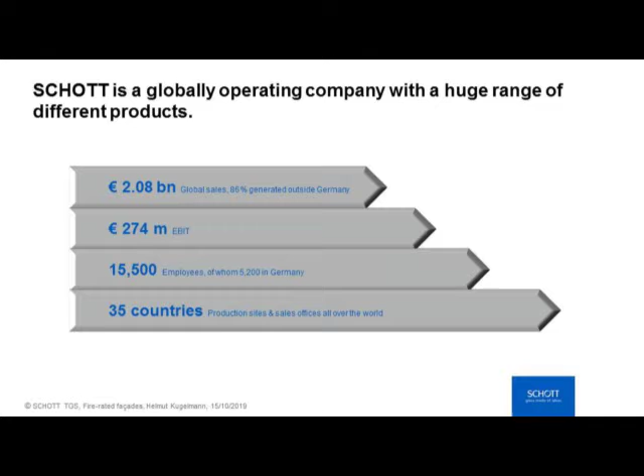First, only a very short introduction of our company. Schott is a very old German company founded more than 130 years ago, and our goal is specialty glass for very different applications. You can see the figures, it's a globally active company. And I have to admit, unfortunately, the sales are not only with fire-rated glass.

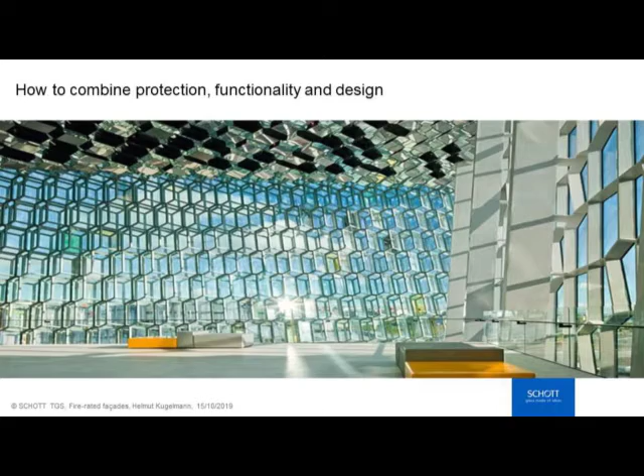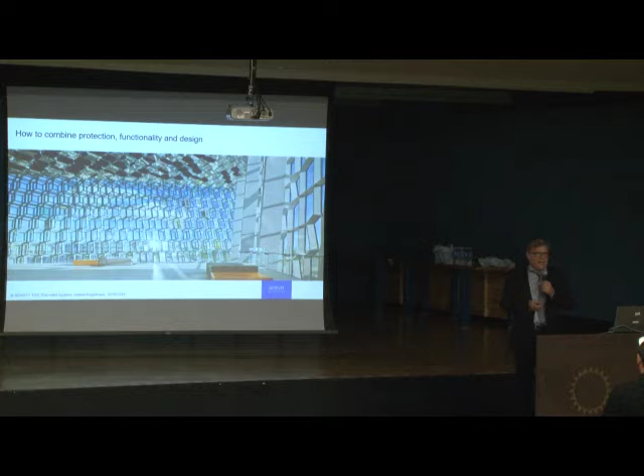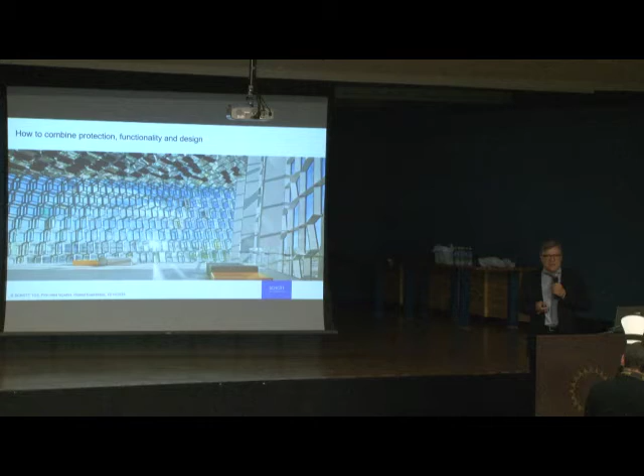But this is our topic today, and the question is how to combine fire protection and other functionalities in architectural solutions. There are many architects here as well, and I guess the architect doesn't want to have a fire-rated glass only for itself. I think the fire-rated glass shall fulfill also other requirements like U value, design requirements and so on, and by the side it should also fulfill the fire rating and the security requirement.

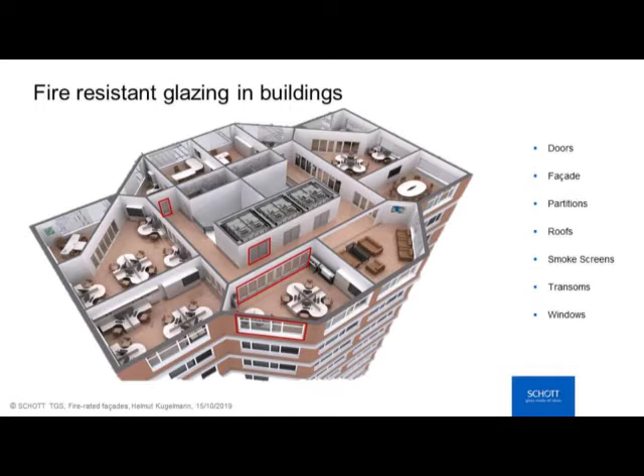So there are a lot of different areas in a building where we need fire rated glass. The most prominent area, as you all know, is the fire rating or protection of escape routes. If you want to have glass in the escape route, it shall be fire-rated glass. But also, partitions, doors, and roof glazings are all applications for fire-rated glass. Our topic today is especially the application for facades.

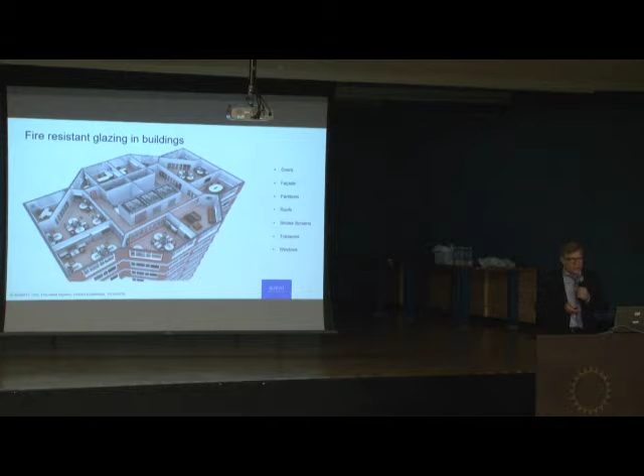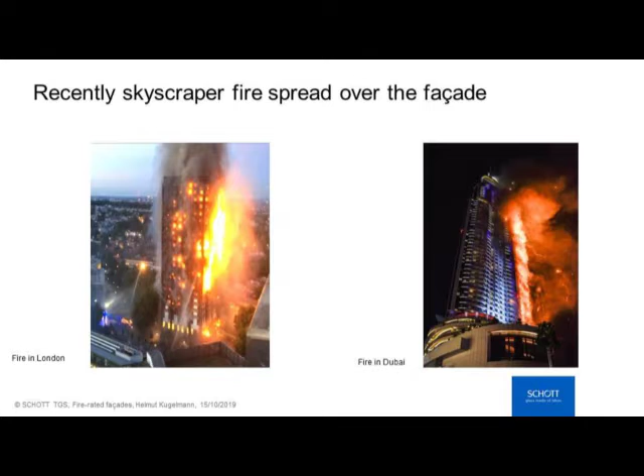This is a very interesting and up-to-date topic, because I'm sure you still have in your mind the crucial fire in London, the Grenfell Tower, where more than 70 people died. It was not because the glass failed, but because the facade system failed, so that the fire could spread very, very quickly from one floor to another.

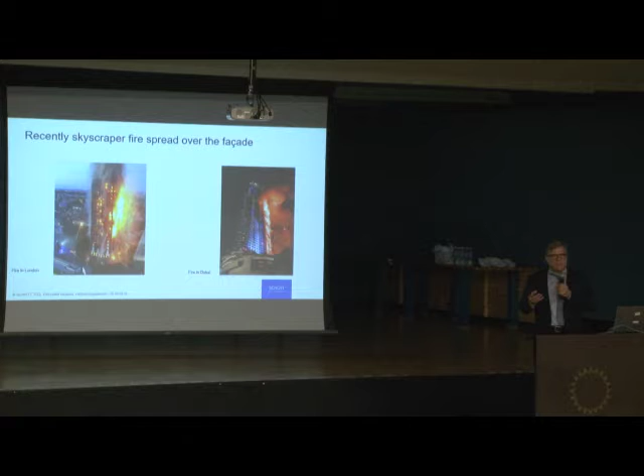And a comparable fire was in Dubai also, I think it was last year. Fortunately, nobody died, but in principle it was the same, that the fire spread very quickly from one floor to another. And the question is how can we prevent such a behavior of the fire.

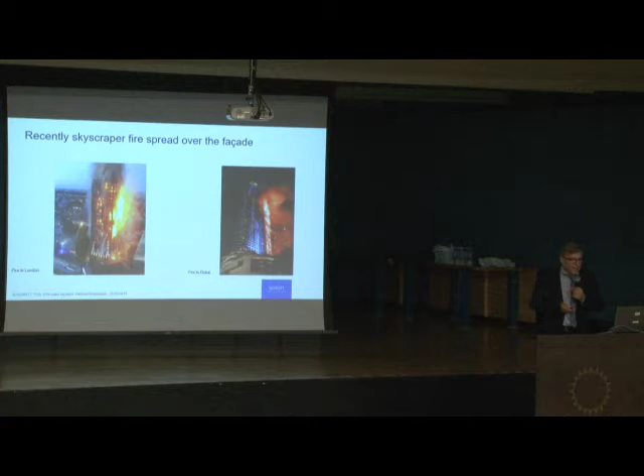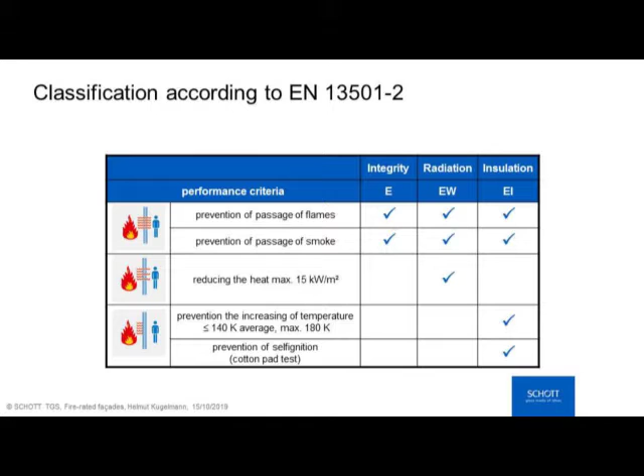So let me give you first an overview of the classification, especially of the European classification of fire-rated glass. We distinguish between three different classifications. This is the criteria E for integrity, and the requirement for E-glazing, like the name is showing, is only integrity. For E-glazing, there is no measurement of the heat radiation which goes through the glazing.

The other most prominent classification in Europe is the EI classification. This is integrity and insulation. Here for EI, the temperature is measured on the unexposed surface of the system, also of the glass.

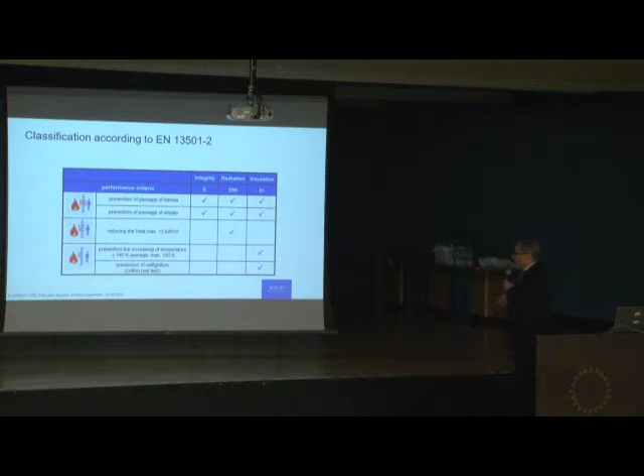So the temperature is measured, and in difference to EI, there is a classification in between. It's called EW, but in difference to EI, the temperature is not measured on the surface, but the radiation is measured at a certain distance, in particular 1 meter distance from the specimen. So it's not the temperature, it's the energy which is measured.

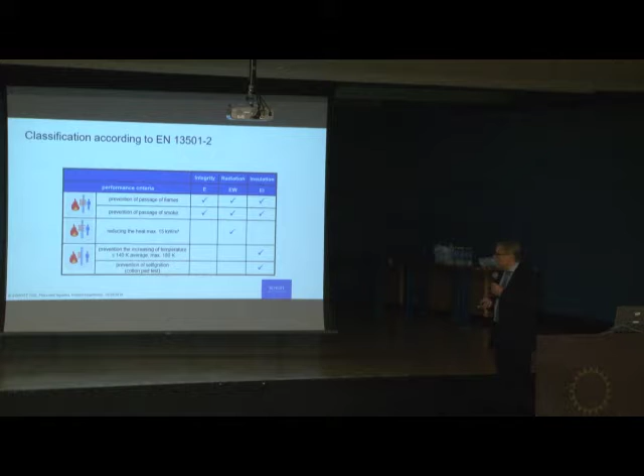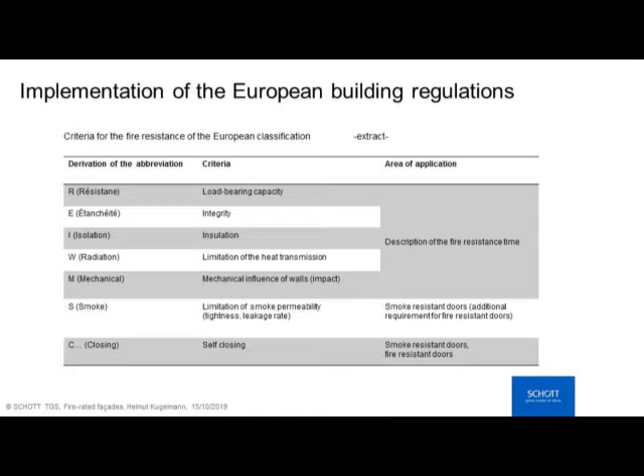A couple of years ago, this new naming of the different classifications was introduced and launched in Europe. Now in Europe we have common naming of the different classifications, and here you can see the meaning of these letters which we are using for E, EI, EW.

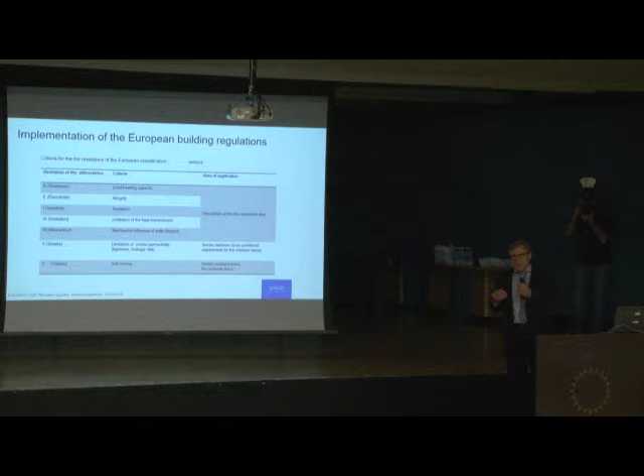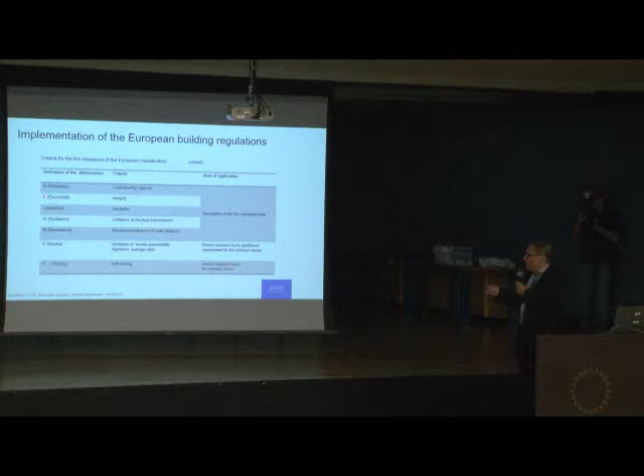The system is actually very easy. E is the French expression for integrity - please do not force me to pronounce the French, I have no clue how the pronunciation is, but the meaning is integrity, therefore the letter E. And for insulation, we are using the letter I, and EI therefore is only a combination of E and I, so that we have integrity plus insulation.

The same is with the radiation. The radiation has the letter W, so it is only the combination E and W, which means integrity and reduction of the radiation. This is in principle the system of the European classification and the wording of the European classification.

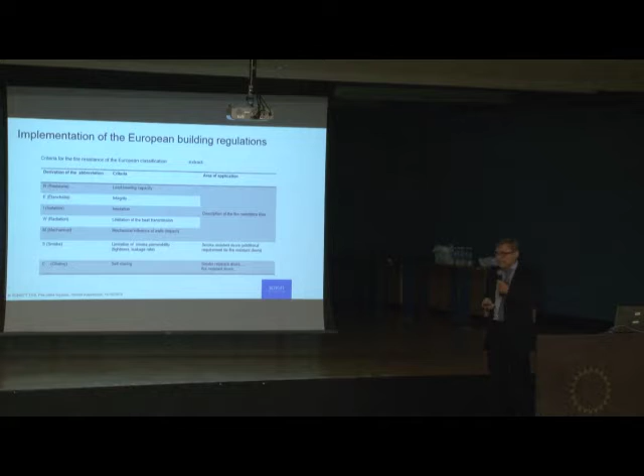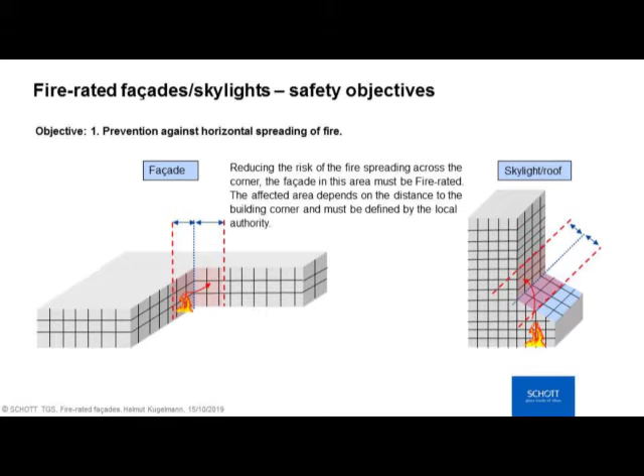So, let me come to our main topic today: facades and glazing in facades. We distinguish two different situations in the facade. The first situation is to prevent horizontal spread of fire.

For example, we have a building with such a shape, and the goal is to prevent, if there is a fire in one area of the building, that the fire doesn't spread round the corner to the other area. Therefore, in most building codes in Europe, there is an area of the facade defined beginning from the corner, and it depends on the country and the building code. It can be from 3 meters to 7 meters distance from the corner to both sides, so that if we have a fire here, it cannot spread because of this fire protection barrier to the other part of the building.

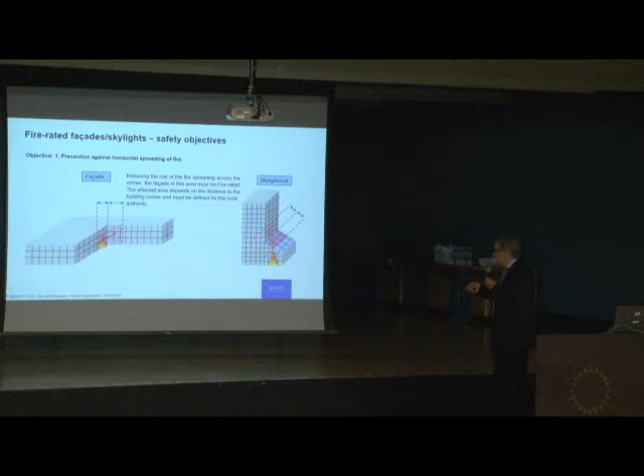Similarly, if we have a skylight in front of an upgoing facade, like you can see here, it's in principle the same. If we have a fire here in this area, to prevent the fire spreading over the skylight to the windows above, we need this area as fire protection. This is the principal system in most building codes in Europe to prevent the horizontal spread of fire.

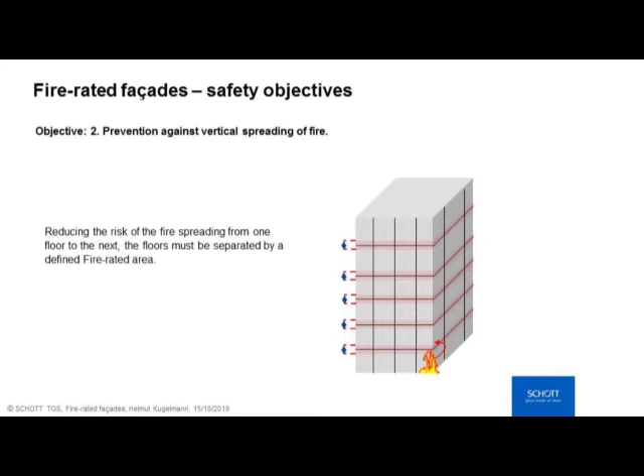In the other case, which is more prominent than horizontal spread of fire, we need to prevent and avoid vertical spread of fire. This is exactly the case you've seen in the pictures of the crucial fires in London or in Dubai. So what can we do to prevent the fire jumping from one floor to another?

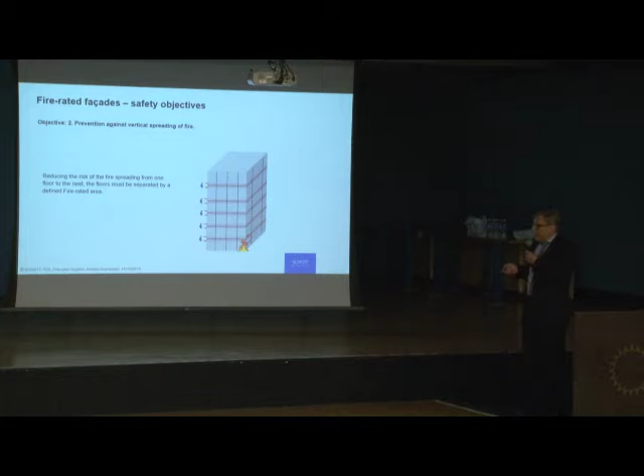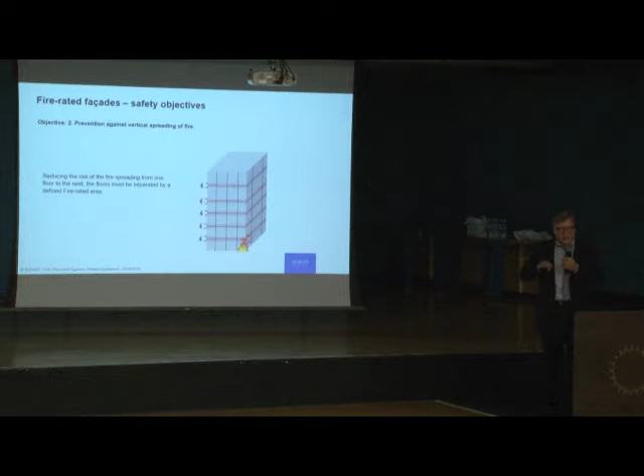Therefore, in most building codes, there is a barrier defined here as a limitation from floor to floor. The height of this fire protection barrier is different from country to country. I have learned that in Brazil, the height of this barrier is 1.2 meters. It's very similar in other countries - sometimes 1.1 meter, 1 meter, or even 90 centimeters.

And it depends also on the height of the building, so if we have a high-rise building, this barrier is higher than for a lower building. But in principle, it's very important for all such buildings to have this fire barrier to prevent the fire spreading from one floor to another.

So how to solve it in case you want to use glass, as much glass as possible - a fully glazed facade, which we of course appreciate - but how to fulfill this requirement to have this barrier included in the facade system, so that there is no difference in appearance from the other non-fire-rated areas of the facade? This is not very easy, and here we come to the different glass types and what is the most reasonable glass type to fulfill this requirement.

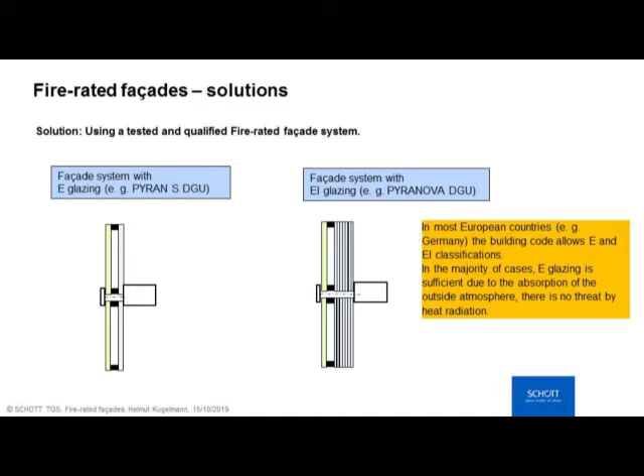To give you an example so you can imagine the difference in thickness between E and EI: if we consider a requirement for 2 hours, 120 minutes, the thickness of an E-glass is 6 millimeters. Compared to an EI glass for 120 minutes, the thickness is 52 millimeters, just for the single glass. So you can imagine it's very difficult to combine such a big system into a standard facade system. Therefore, from the technical and combination side, E-glazing is much easier to handle.

We have to consider that in cases where we prevent the spread of fire from one part to another, the fire in every case goes outside of the room, outside of the building. Then after a while, after a certain distance, the fire wants to come back into the building. This passage and distance is outside, so the atmosphere absorbs a lot of the energy of the fire.

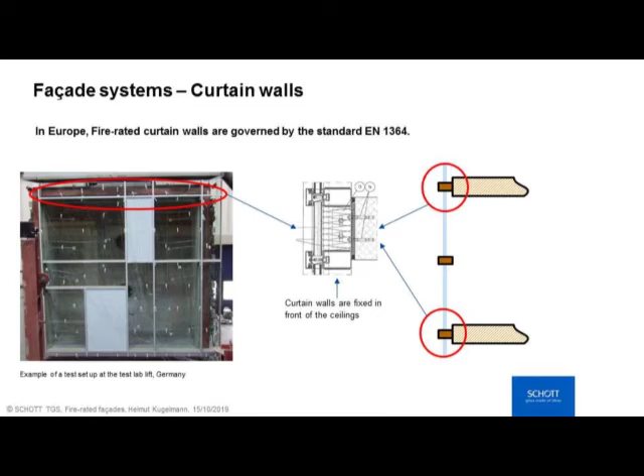And this is a test setup of a facade test, done at a test institute in Germany. There is a special standard for how to test facade curtain wall systems. Here, for example, the curtain wall system is where the facade is mounted in front of the slab.

So the testing has to consider not only that the fire doesn't go through the glazing, but also that the glass and flames do not pass through the mounting to the slab. That's why in this test setup there's a 5-meter furnace, and this test setup displays this situation: the facade system goes in front of the furnace up more than half a meter, so we can simulate this system and situation.

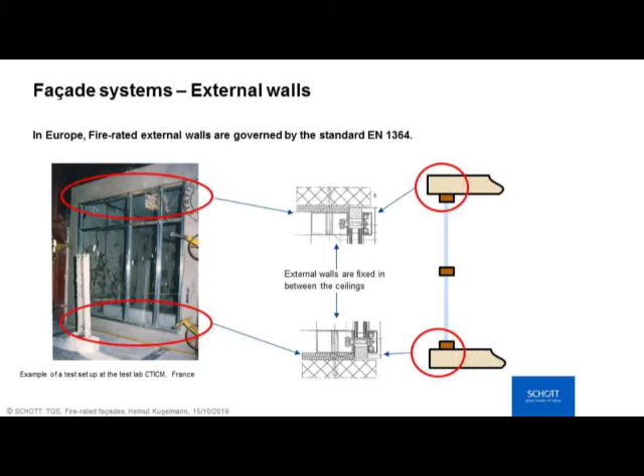In difference, we also have the situation where we do not always have a curtain wall. Sometimes we have external walls, like a window or a couple of windows combined in an external wall. The test for this external wall is different from a curtain wall, because the external wall is installed on 4 sides to the brick wall. Here you can see the installation and mounting of an external wall, connected on 4 sides to the surrounding wall. This makes a huge difference in the test method and installation.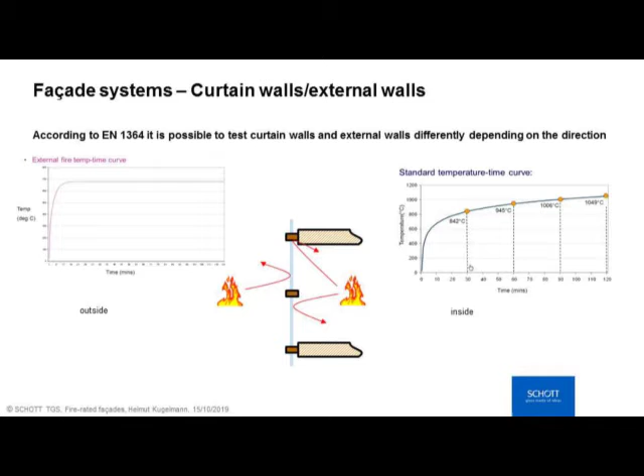But what I mentioned before, in summary, for both systems we have to distinguish the temperature curve depending on whether the test is conducted from inside or from outside. In any case, the test has to be done from both sides, so in Europe we have to carry out 2 tests.

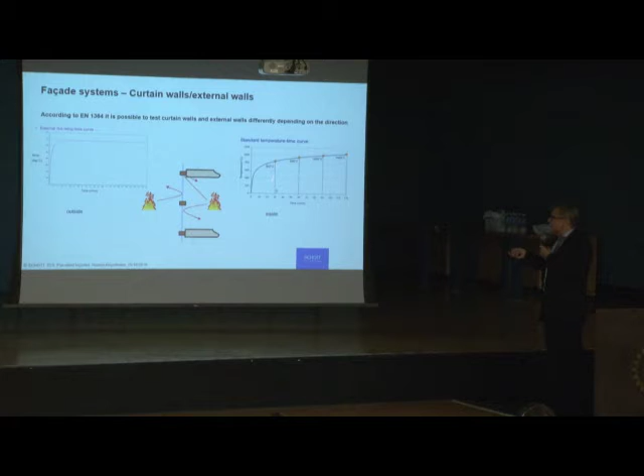The first test is from inside, and from inside the test has to be done according to the standard temperature curve. Here you can see the standard temperature curve rises permanently up, so after 120 minutes we have a temperature of more than 1,000 degrees. This is the case in the test method if the fire is inside.

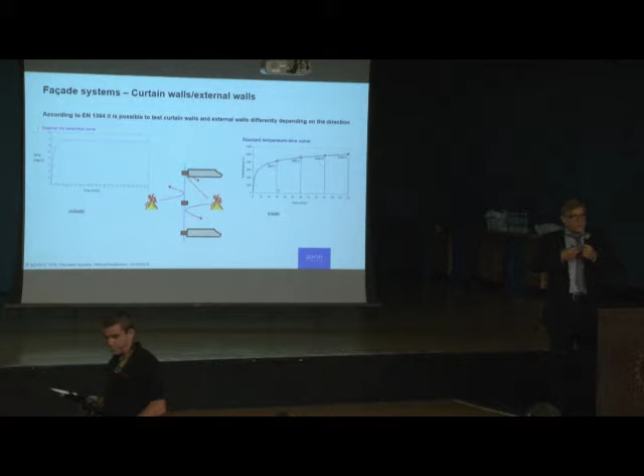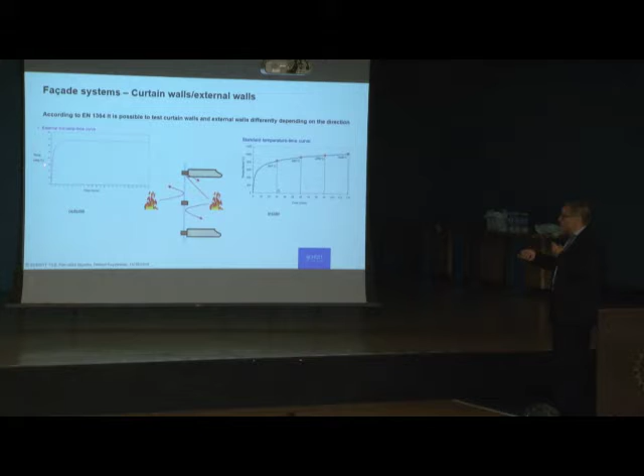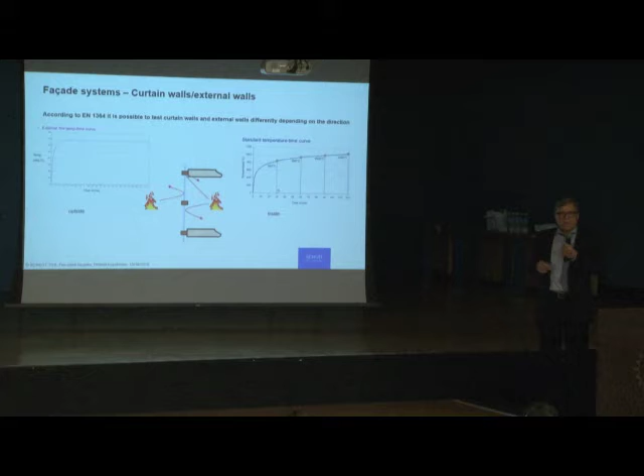But the second test, to simulate when the fire is outside and wants to spread to the next floor, because of the absorption of energy by the atmosphere, we do not need to carry out the test according to the standard temperature curve. For this test, an external temperature curve is defined - you can see it here. The temperature stops at 660 degrees and keeps at 660 degrees up to 2 hours.

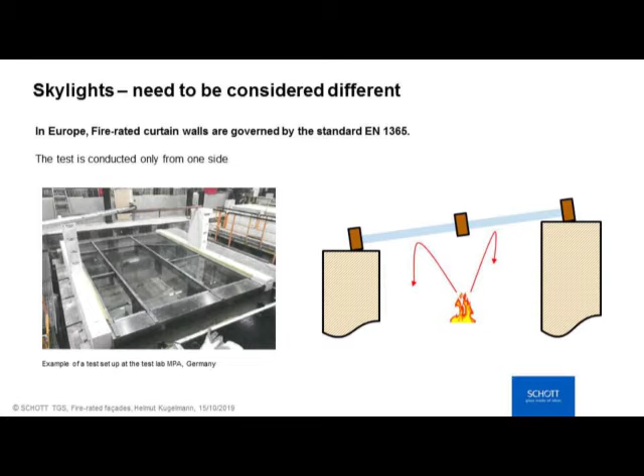And similarly for skylights, we have a little differentiation from the facade systems. For skylights we only have to test from one side, only from internal. It doesn't make sense to test from outside because the fire will not go inside through a skylight, so we only have to test from inside.

And I know from many discussions in Europe, firefighters and fire consultants think that the glazing will withstand the fire and also will not fall down for a certain time - 30, 60, or 90 minutes or whatever. But in any case, independently of whether we use E-glazing or EI glazing, the lower glass will fall down.

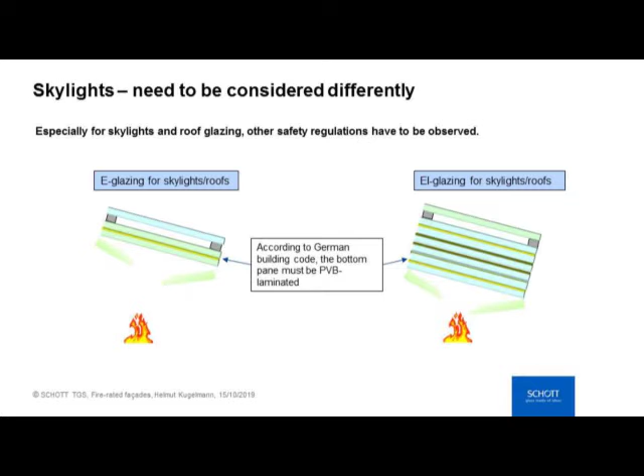This we cannot avoid, and it is also not the target of the fire-resistant glazing, because the target is to prevent the spread of fire to the next floor. Therefore, firefighters and all participants at such a building must be aware that in case of fire, the glass will fall down from the skylight.

I was told, I'm not a firefighter myself, but I was told by European firefighters that it is not mandatory and not a big deal that the glass falls down, because in case of fire, when the glass falls down, there is anyway nobody under the roof and inside of this skylight.

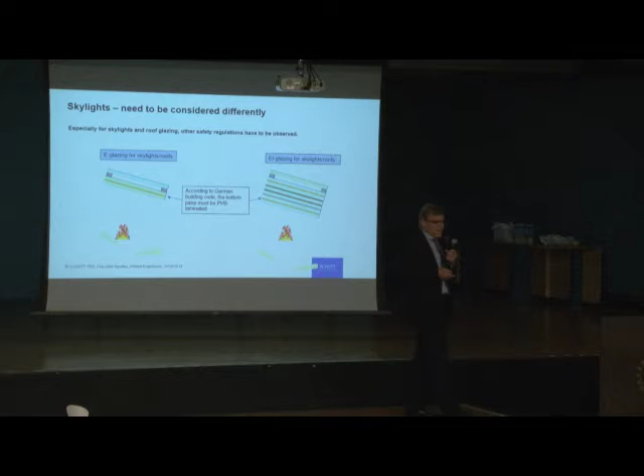Sorry, I have mixed the slides, because here I wanted to show you, especially for this case of the fire protection barrier from one floor to another, a very tricky solution. Because what solutions do you have to fulfill this requirement, this barrier?

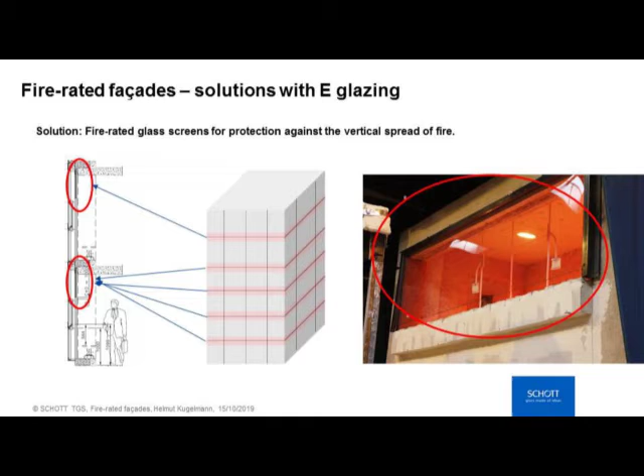So the easiest way, and the one that would make us happy, would be to have the whole facade with fire-rated glass - but it's nonsense. It would make us happy, but it makes no sense. The other way is to have only parts of the facade, and include in the facade a fire-rated glass.

This is also very difficult, because as you've seen in the slide before, the fire-rated glass in the composition can have a different thickness and different appearance than the rest of the facade.

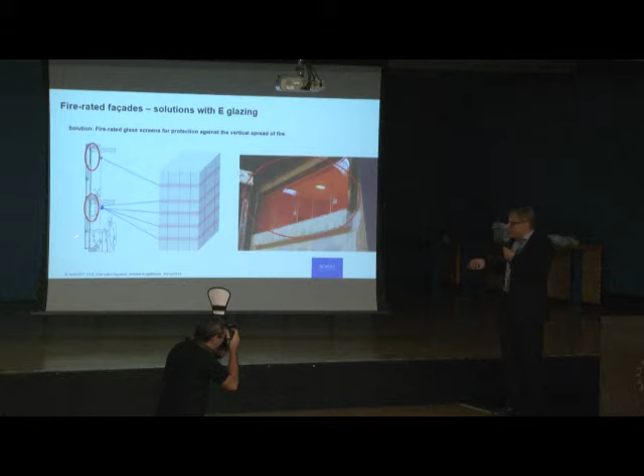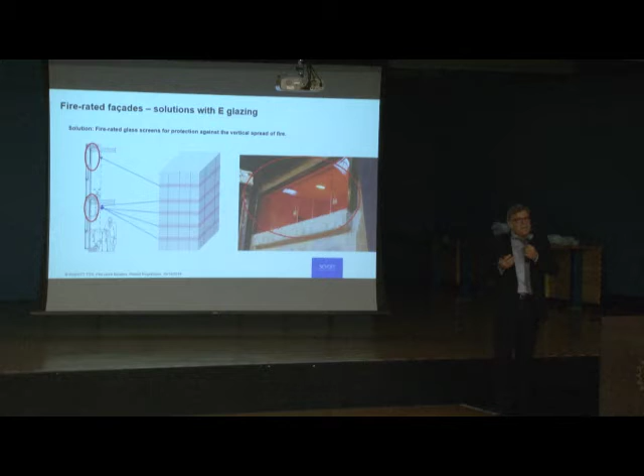Also the system does not fit, and there's no test evidence that the facade system will fulfill the fire rating. So based on a requirement from a project in France, which I will show you later, there was the idea to move this barrier up to the ceiling, so it's not mounted or installed at the floor. The idea was to move the glass up and install it above on the ceiling, like where we have a lot of experience, such as smoke screens, which are also installed on the ceiling.

We carried out a fire test, which you can see here. The glass was installed on 3 sides. This test was for 60 minutes, but it would stand for a longer time too. The requirement for this French project was 60 minutes. I'll show you afterwards how it looks in this specific project.

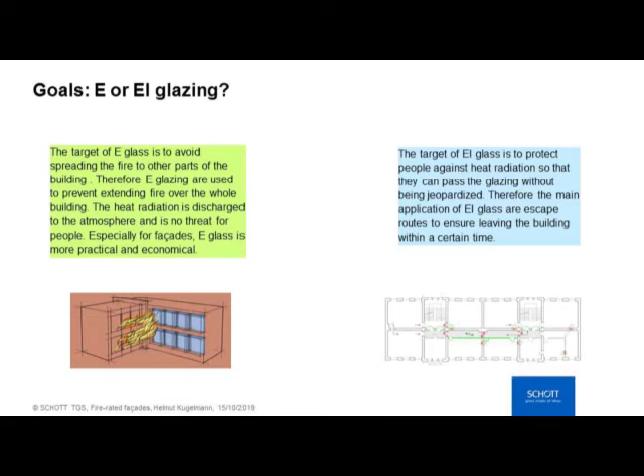To summarize this facade system, or the application of this kind of glass, from our point of view the E-glazing is the most sufficient glass for facade because of the absorption of the energy of the atmosphere, and therefore it's not as expensive or as difficult to include E-glass in the facade and the complete system.

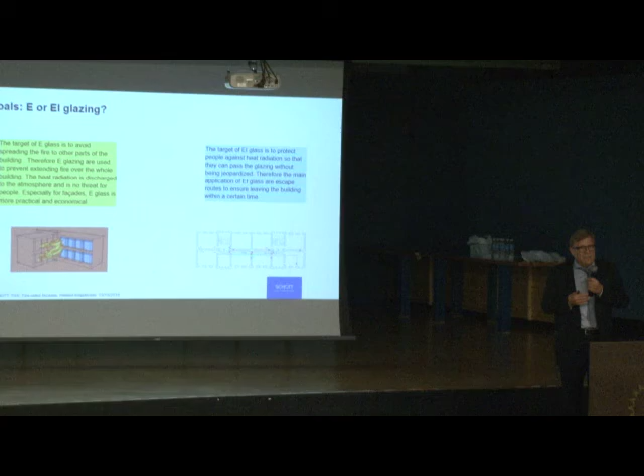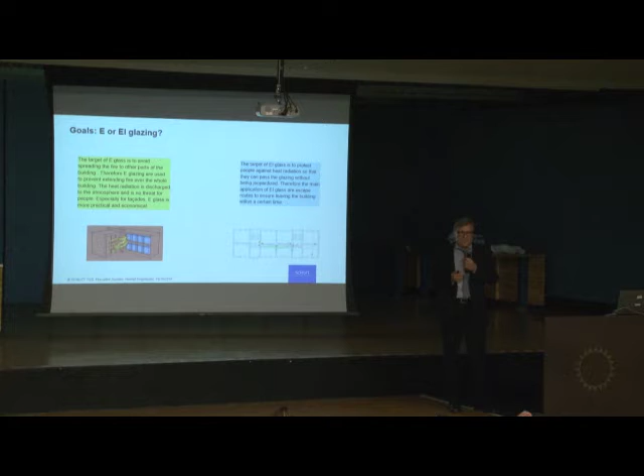But I have to point out very seriously that E-glazing in an escape floor, in a very narrow escape floor, is not the right glazing. For escape floors in internal areas, if you have glazing there, EI glazing is mandatory because of heat radiation. You cannot pass close to an E-glazing, you cannot pass an E-glazing during a fire, and therefore for such escape routes it's really mandatory to use EI glass. This is not the proper application for E-glass.

Now I want to show you some applications where we have done E-glazings in facades, to give you an example of how it worked in practice, and especially this French system I want to show you in a bit more detail. Here you can see this building, and like you've seen in the slides before, these areas need to fulfill this fire protective barrier, which was also 1.2 meters.

The system you've seen in this photo, what we have tested, is like here: the E-glazing was installed on the slab on the ceiling, and the outer facade was not interrupted by another fire-rated glass. In total, the thickness of the slab was 40 centimeters, and the E-glazing was 85 centimeters, so in total we had this barrier of 1.2 meters.

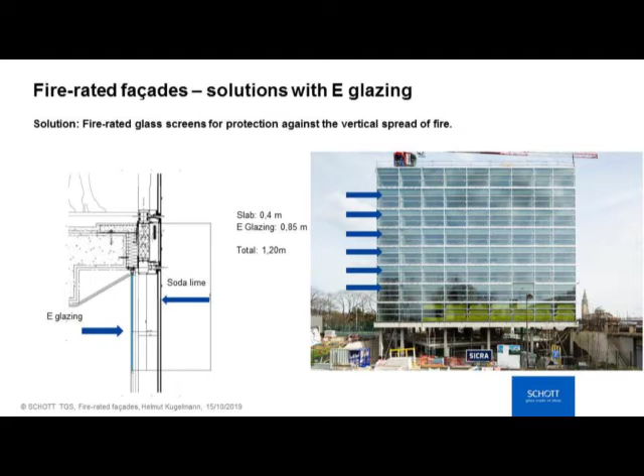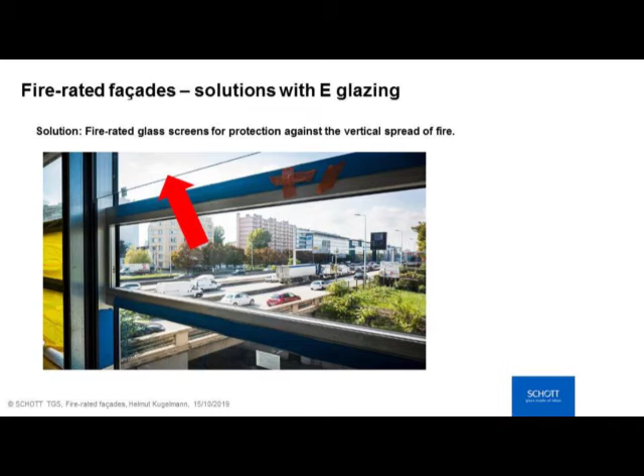This is a photo through the facade, and you can see here this E-glazing installed, and it's almost invisible. You can see it's not disturbing, and installing the heating on the floor is no problem at all. So it's a very smart and very tricky solution.

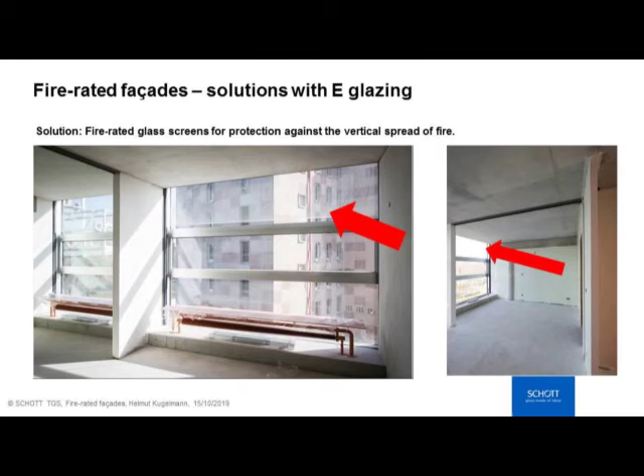Another project is this one in Germany, where we had a typical skylight in front of a going-up facade. It's very typical because you can see the windows above the glazing, and the target was to prevent, in case of fire inside this skylight, the fire from spreading through the glazing to the windows above.

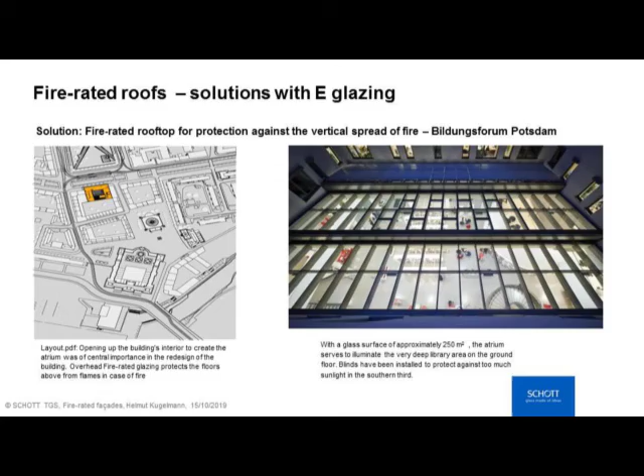Here in this area we had fire-rated glass, classified E30. This is the view from internal, and you can see very well that it's necessary to protect the windows above against the spread of fire.

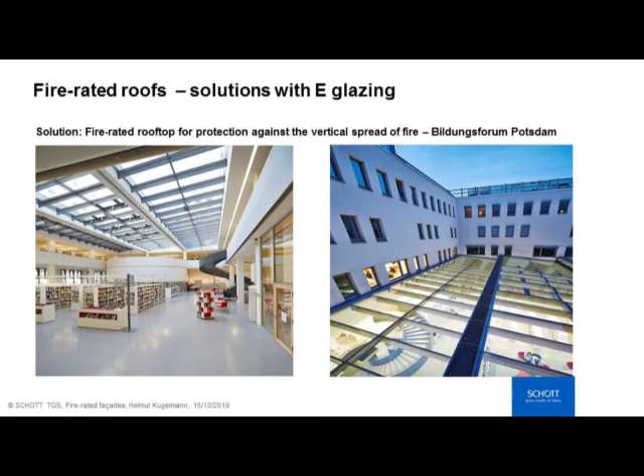Especially for E-glazing, there was a comment from a firefighter in Germany. He said he prefers E-glazing over EI glazing for skylights, because in case of fire, if an EI glazing were here, it would insulate because of its insulation function, and the temperature would increase more above compared to an E-glazing, where the temperature and radiation can pass through the glazing.

That's not my idea, I have to admit it was the definition of a firefighter.

Here are typical facade applications. This is a building where the complete facade was done with fire-rated glass, a point-fixed fire-rated glass. It's a very transparent building, so you only have the slab as a fire barrier, and this was not enough, so the decision was to have the complete facade in fire-rated glass.

This project in Paris is also very typical because you can see the high-rise towers, and the connection between the towers also needs fire-rated glass to avoid the fire spreading from one part of the tower to another. It's a very typical application.

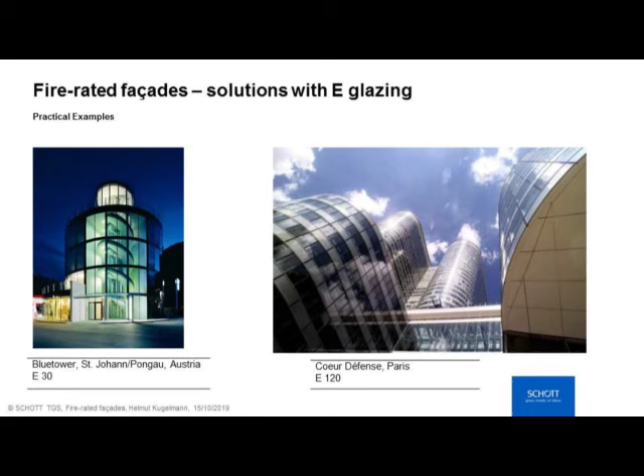Also this smaller building is very typical. This is the staircase, and it also has to be protected between these two parts of the building.

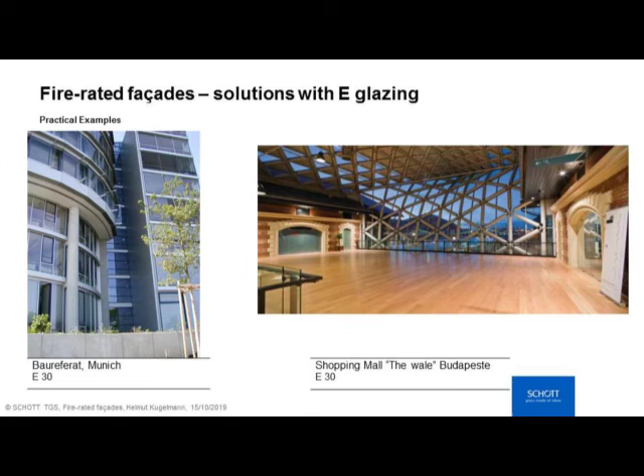This is a very nice, fancy building called the Whale, in Budapest. Here the challenge was that the fire resistance requirement was in the connection from the facade to the roof and to the skylight. The basis for this project was a fire test which had to be carried out, and it was also requested to test the different shapes - we have a lot of triangles, and we had to prove that the triangle shape also fulfills the requirement.

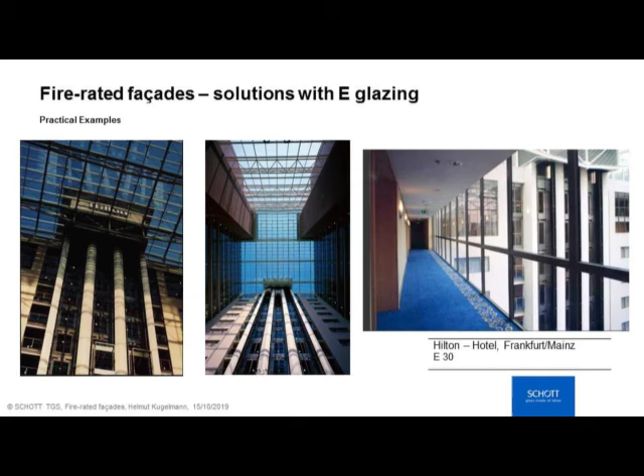Here we have a different situation, not an external facade but a huge atrium. This Hilton Hotel in Frankfurt is a good example. You're looking from the atrium into the surrounding parts of the building, the floors, and the protection of the floors and the hotel rooms nearby. Here you can see an E-glazing - the argument was that if there's a fire inside the atrium, the temperature on top is not as high as the standard temperature curve, so it's sufficient to have E-glazing even for an internal application.

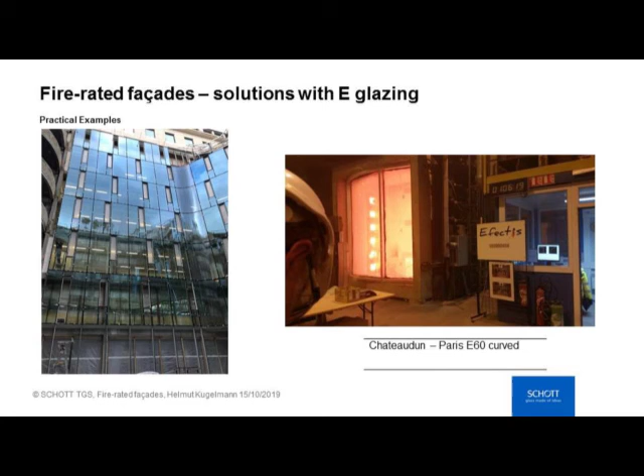Back to a typical external facade, this is a project we did this year, also in France. We have a typical building corner shape, but the architect wanted bended glass within the corner of the building. Because all these areas had to be fire rated, including the bended glass, the requirement was to test a bended E-glass as a double glazed unit within this facade system.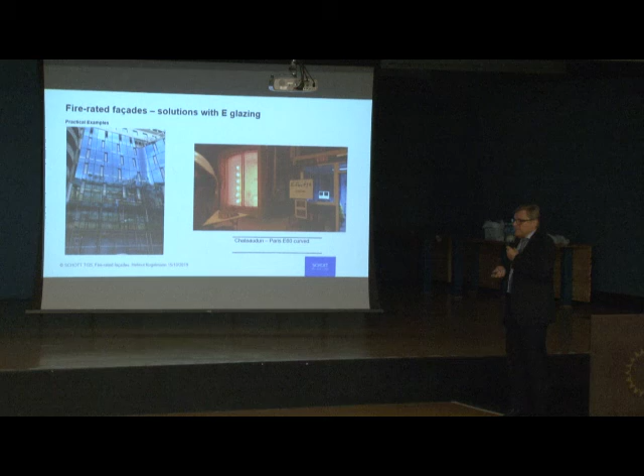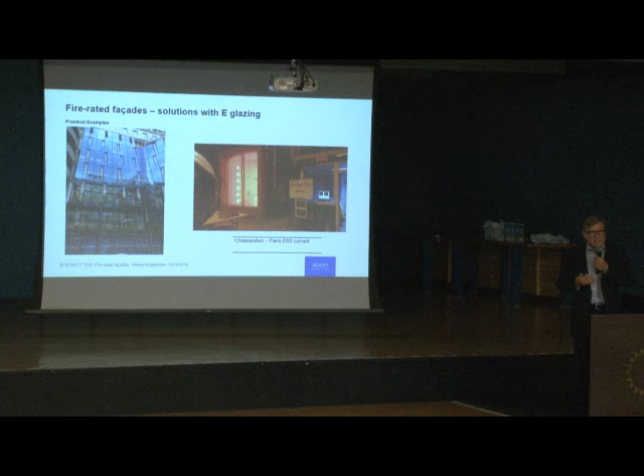So a test was carried out at Efectis in France. This was a one-to-one test, exactly the size and system installed later in the facade, so we have the assurance and safety that the system works as originally tested.

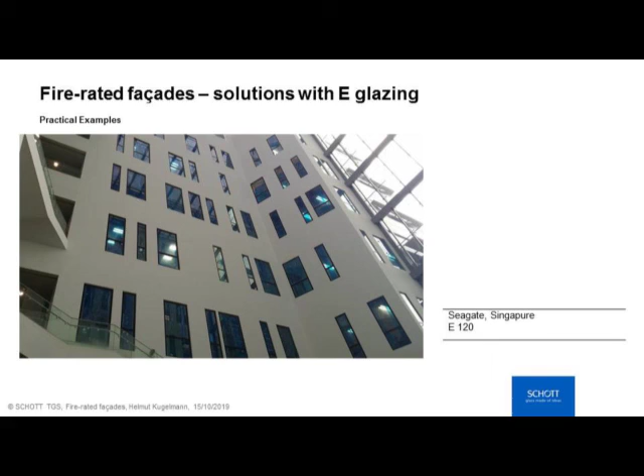Again an atrium situation here, this building in Singapore. These single windows inside the atrium were requested to be E120, and it was sufficient to use E because of the dimension of the atrium and the expectation that the temperature will not rise as high as the standard temperature curve.

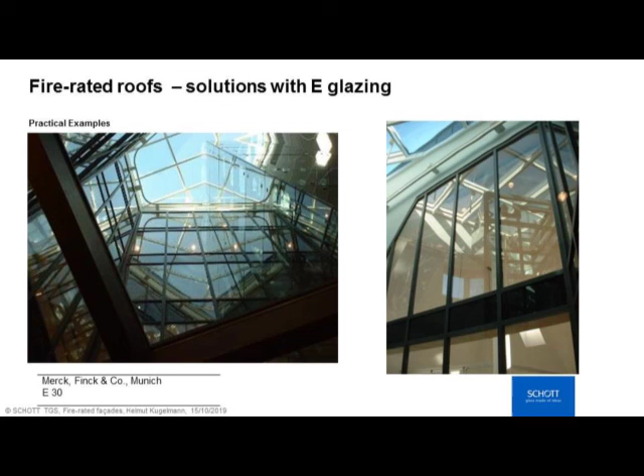Also a system and project in Germany, the same situation - an atrium, and the surrounding internal facades are E30, with the same argumentation as before. I want to point out the roof glazing above had no requirement - this is normal glazing, not fire-rated glass.

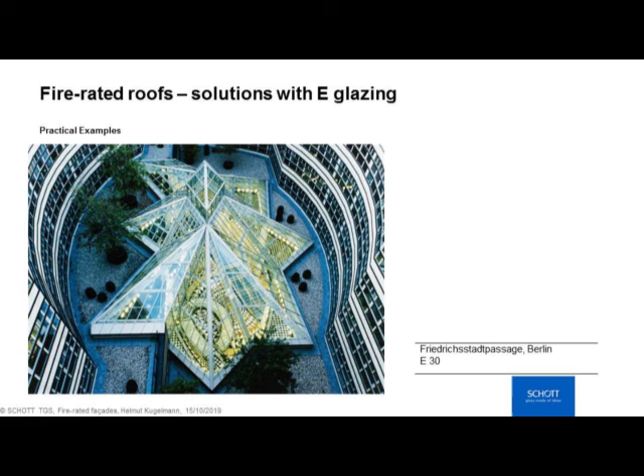More or less at the end, one of the most fancy projects from my point of view, this project in Berlin - this skylight was completely fire rated, an E30 requirement, so that if there's a fire inside, the surrounding facades will be protected against fire. It's a very complicated system, very complicated construction, and also the glass - we have a lot of different shapes, it's a very fancy system.

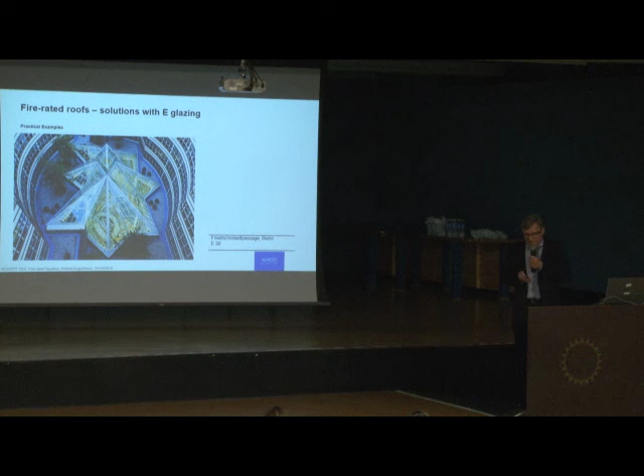Thank you very much, and I hope I could give you some impressions of what we are doing around the world, and what we think is the most reasonable application for E and EI glazing. Thank you very much.